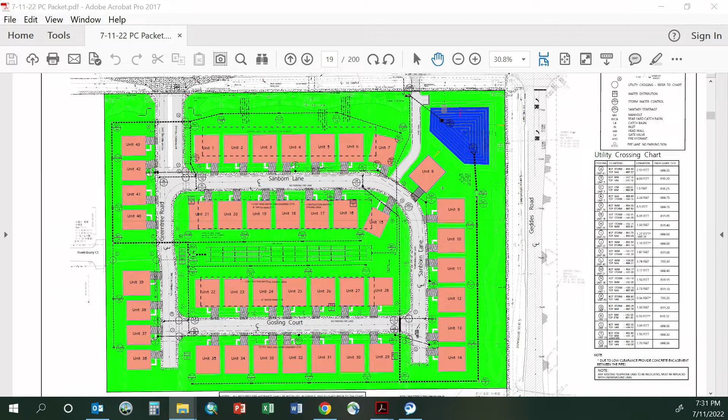Go right ahead. I move to recommend approval of the final site plan on tax parcel number 126-99-0008-701, which includes 43 single-family detached residential condominiums located on 11.51 net acres, subject to the applicant locating the entrance light poles closer to the sidewalk crossing at the entrance from Geddes Road, and also obtaining all agency permits and submitting financial securities to the township prior to review by the Board of Trustees.

All right, we have a motion on the floor by Commissioner Okon and support by... what's your name again? Foster, Commissioner Foster. I was having a mental block there for a minute. Any further discussion on that motion?

Nothing? Okay. Commissioner Okon, would you call the vote on this, please? Sure. Commissioner Foster: Yes. Commissioner Okon: Yes. Commissioner Watkins: Yes. Commissioner Weber: Yes. And Chairman Green: Yes. So the motion passes, and so it goes to the trustees.

Probably within the next month or so, that's correct? Okay. All right, good luck to you.

Our second agenda item of the evening is Greenland and Sage, where we're considering a site plan approval for property located at the southwest corner of Cherry Hill and Denton, part of Cherry Hill Village. The proposed use is a grocery store and bakery. Patrick, could you give us more detail?

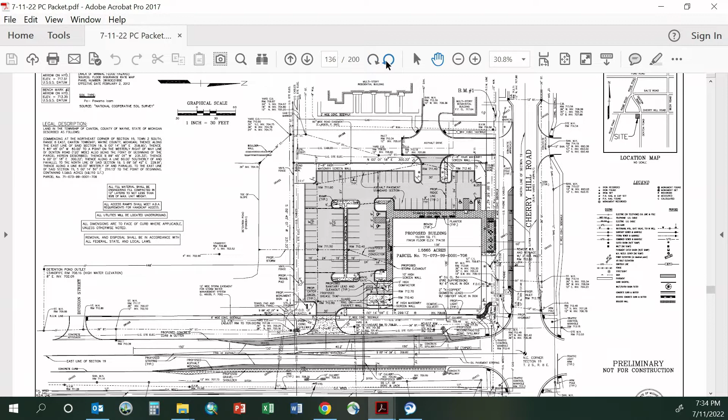Okay, north is to the right there, so I'll turn this. Okay, that's a little better. And the site is located in the...

The report says it's the village edge area, but actually this area is the village core, and that's in the Cherry Hill Village Overlay District. The ordinance states that the guidelines of the Cherry Hill Village design guidelines will prevail over the underlying zoning district. Although the original agreement for the PDD in Cherry Hill Village expired in 2014, the site is still subject to the standards of the Cherry Hill Village Overlay District, which is 6.09 of the zoning ordinance.

The last application on this site was a Rite Aid, which was approved in 2007, but it was not built and the plans eventually expired.

The layout of the Greenland and Sage building that's proposed is very similar to the layout of the previously proposed Rite Aid building, where the building is located close to the northeast corner of the site, and the parking is located to the west and to the south in the side and the rear of the site.

The Cherry Hill Village Overlay District requires that all projects be treated as a planned development. Each planned development district is required to demonstrate definite benefits to the community, and the definite benefits of the site include the architectural design and the outdoor dining amenities.

The Planning Commission reviewed the planned development for the proposed grocery store and bakery on February 7th, 2022, and also held a public hearing and recommended approval. At the meeting of the Township Board on March 8th, 2022, the Township Board approved the planned development for the site. The site plan has been designed in accordance with the plan development agreement.

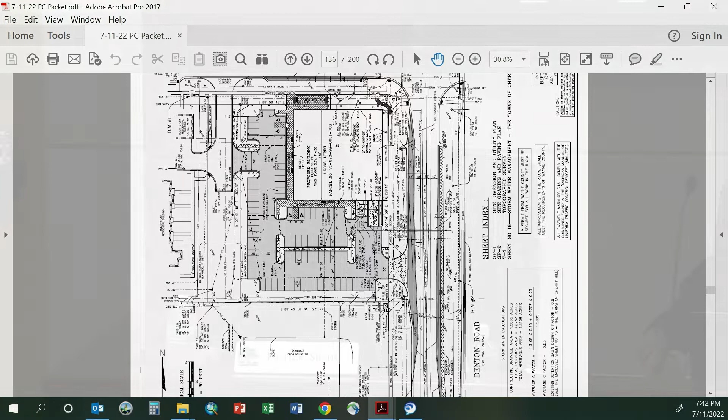Finally, for the stormwater management, the site is proposed to drain to the existing stormwater ponds located directly south at the corners of Cherry Hill. These ponds are designed to hold regional drainage, including for this site, and this site has been included in the drainage calculations within those ponds. Therefore, the pond and the drainage is already accounted for, but stormwater is under the jurisdiction of Wayne County, so we would defer to Wayne County when they do their eventual review of the plans.

So with that, the planning staff's recommendation is approval of the site plan for a grocery store and a bakery, as illustrated on the site plan for the reasons stated in our review, including waiving the foundation landscape requirements on the west and south sides of the building, and a waiver to modify the number of required parking spaces to 82 on-site spaces and up to 6 on-street spaces, subject to the items noted in our review being addressed and corrected, and also subject to all state, county, and township requirements.

The last item I want to mention is that the foundation landscape requirements on the west and south sides were areas identified during plan development review as not having the area for foundation landscaping, because it's a very tight site, with the building meeting an adjacent sidewalk. So foundation landscaping really doesn't work in an urban setting when it's up against the street or an adjoining parking lot in this case. The zoning ordinance gives the Planning Commission discretion to modify the landscape requirements, including the foundation landscape requirements, when appropriate. So we do recommend that the waiver be approved on the west and south sides of the building, although the landscape material on the site does include sufficient foundation landscape material elsewhere.

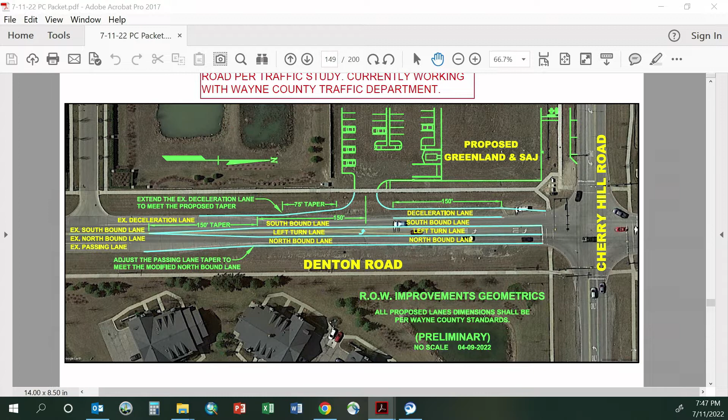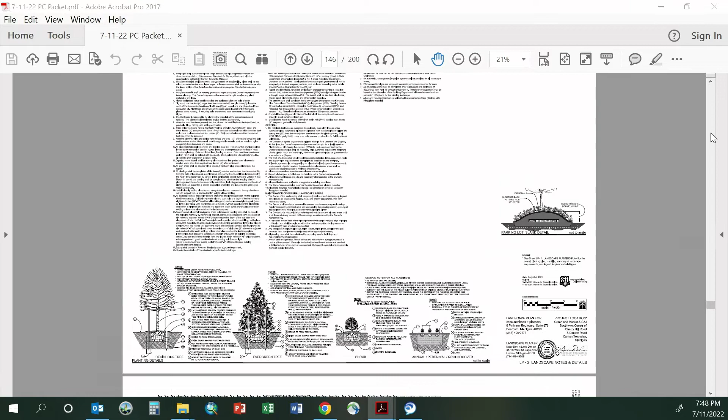One of the things about Denton Road, and everybody who lives in the community knows, on a Friday at 3 or 4 you're going to have school kids getting out of school, and at the same time people coming to the grocery store. The worst confluence of events is to have both things happening at the same time, and there isn't going to be sufficient capacity for the traffic that will be happening there.

The second thing, notwithstanding traffic going north and south, is that you've got buses, you've got parents. My kids go there, and I know what that line looks like every single day, backed up onto Cherry Hill and/or Denton to the north. So I just want to be sure that the traffic is really going to be addressed.

Love the development, love the changes that have been made, love that this project has been to the commission even before I became a commissioner. But I just want to ensure that the traffic is going to be addressed in the greatest way possible. The last thing we want is to build this in the greatest way possible and then look back and say, yeah, this is a bottleneck that we didn't address.

Thanks. Commissioner Okan. Yeah, two questions. Number one, Patrick, on the parking, so we're proposing 88 parking spots. If we look at the site plan, unless I missed it, where are the cart corrals?

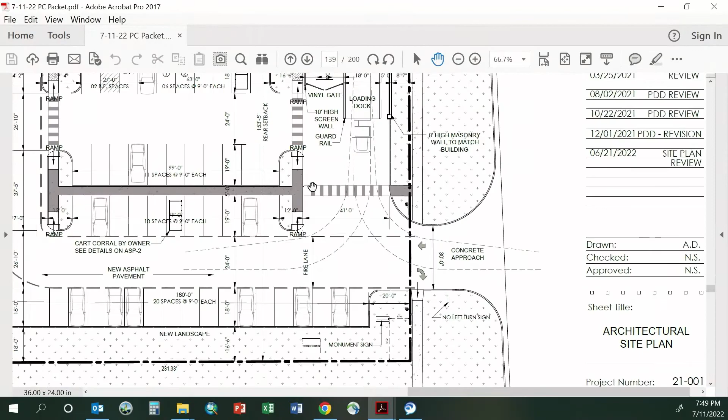The cart corrals will occupy three different spaces that exclude the 88 parking spaces. So there's one here, and then there's one closer to the building here, to the south. So the 88 is to the left, including the cart corrals, that's excluding them. So if the cart corrals were not there, it'd be 91.

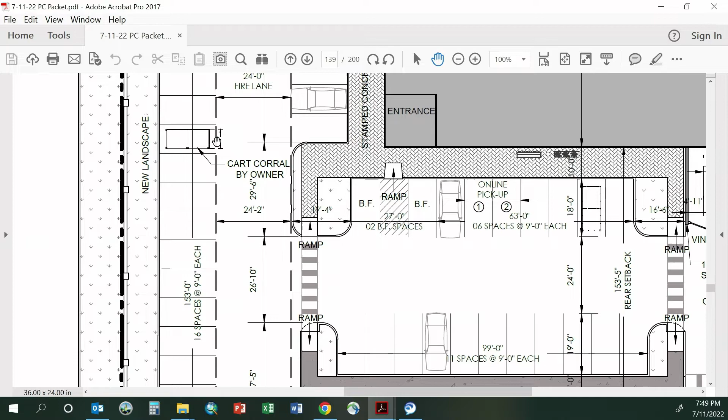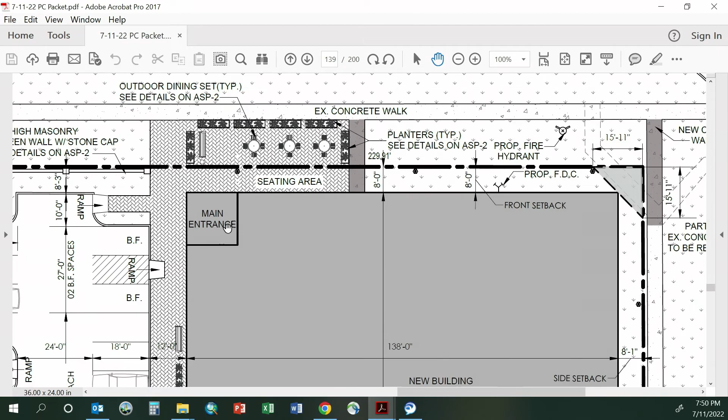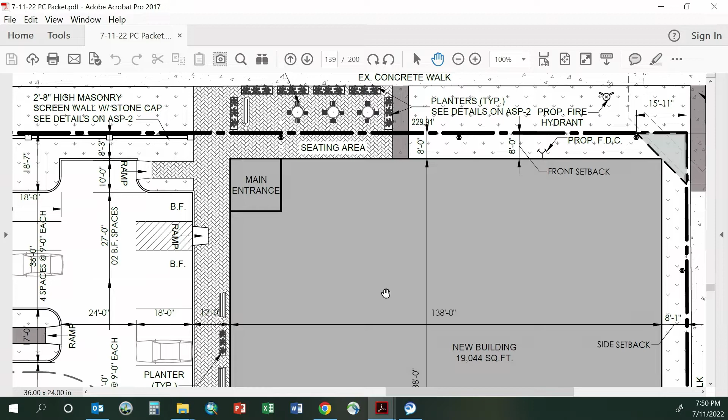And the second question I have, since this is an urban site with all the surrounding residential, do we have a designated spot for bikes? Bike parking, bike rack, anything? On this plan, I don't think that there is a dedicated bike parking area. I would just recommend having a designated area, because like you said in your report, I can imagine people riding their bikes up there, and it'd be nice to have them all in one area versus scattered throughout the parking lot or sidewalk. Other than that, I think it's great. I agree with Mr. Watkins.

It's hard to believe we're allowing a left-hand turn out of there onto Denton, but if that's what the county is recommending, I'm okay with it. One item of note - oh, no left turn right there. Yeah, this was something we addressed during the plan development review. There were issues with the potential for a left turn out of there, so the applicants put the no left turn sign on the plan development plan. So there will be a no left turn sign there. Perfect, thank you. Other than that, this is terrific, I can't wait for it to be built.

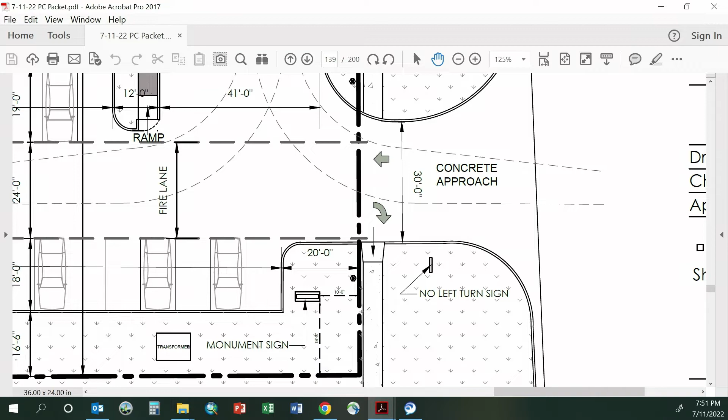You gonna start tomorrow? Well, to answer the commissioner's concern regarding commencement, the improvements to Denton Road are concurrent with the project construction. A traffic study was conducted - Wade Trim looked at it, the township engineering looked at it, the county looked at it. I'm only an architect, I don't do traffic, but they all buy into it.

While you are up there, I have a couple of questions concerning site things, like lighting. I'm concerned that whereas you have signage listed here on your exterior elevations, there is no lighting that is projecting outward. Is it going to be downlit? We would like - I don't know if Patrick can show the rendering. Our concept is to really create a downtown market feel to this, and we would like to revisit.

We did comply - I wonder if you can go to the colored rendering. We did meet the ordinance in terms of the foot candles and light pollution. But as far as the building facade itself, we would like to discuss that and see if we can put up some of that signage we show on the rendering. We think that's an enhancement to the downtown look. We have some waterfalls shown... for some reason it's not showing up, I'll have to close it and restart it here.

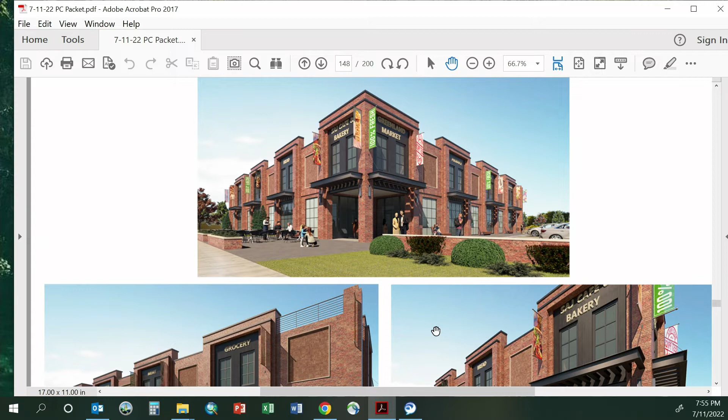Okay, again, we intend to comply with the zoning ordinance. The other concern - let's go back to Commissioner Okan's question, which was excellent. If we're talking about this being more of a walkable community, people will be riding bikes, et cetera, and they need a place to put those bikes. We had that at one time, and we think the right location for that bike rack is right by the patio on the north side of the building, on Cherry Hill. Okay, so can you work with staff on something like that, in terms of positioning, numbers of slots? Absolutely, yes.

And I think that would answer your objection, Commissioner Okan. Yeah, the other thing that I have is a very visible thing.

So you're going to have 3 cart storage areas. What happens to those carts after hours? What will happen? They would be put together and secured and in place. In those storage bins? I would assume, yeah, unless, not inside? In the store or in the corrals? In the corrals. Is that the intent?

No room for them to be moved into the store? There is some room, yes. I would prefer that. That's a much better look than having them contained in the corrals.

Frankly, personally, I am against the corrals because putting the corrals in there, that is an opportunity to have all those carts congregate there sometimes in a chaotic way. Not having the corrals in there forces the management to take them inside.

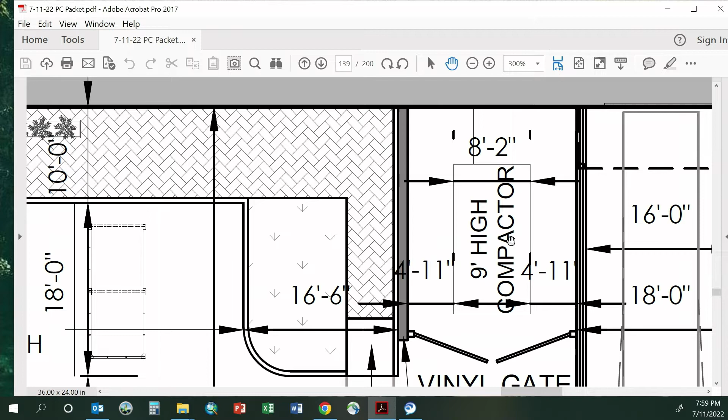Obviously to avoid it going into the stormwater. But my point is not to bore you with the details, that has been thought of.

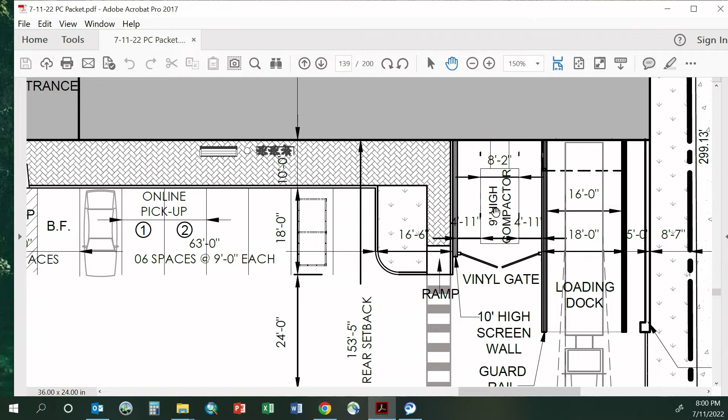And we've addressed the hours that they can operate that compactor, right? Because compactors make a lot of noise. And being that that compactor is facing the south, that noise is going to go right to that adjacent neighborhood. So how late can they operate that compactor?

There have been cases before, I think BJ's Wholesale comes to mind, when we had a condition where there were certain hours that they could run the compactor because they were by a residential neighborhood and there was concern that if it's a high volume business late at night, that could be an issue. There were concerns from the neighbors about the noise, primarily from Lowe's, but they were concerned with BJ's having the same impact. So in that case there was a restriction on hours that the compactor could be operated. In this case, the plan development doesn't have that condition in terms of the hours.

And I don't know what the noise impact is, given there's a few rows of parking and some landscaping between the compactor and the residential area to the south. So I don't know what the noise impacts would be.

By default, the noise provisions of the zoning ordinance would apply. So the maximum noise goes down during the nighttime hours, so it's quiet, and then higher during the day. So if there was no condition, then the noise ordinance would still apply. So if there were noise impacts at night that exceeded the zoning ordinance, then ordinance enforcement would have to work with the business owner to comply with the ordinance.

But also, the truck dock has room for one truck. Do you have a plan in mind should you need two trucks, one waiting for the other to be unloaded? Do you have a stacking area within the parking lot? We do have allocations for that. We have a truck well for deliveries, and the compactor is also picked up with a truck, and that has its own access.

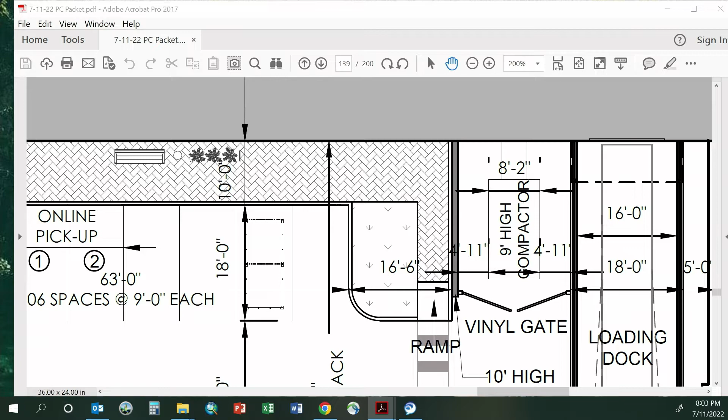Okay, all right, well, those are my main concerns. I do echo the comments of my fellow commissioners that we welcome this project. I think it'll be good for Cherry Hill Village, good for the community, and I think you're going to get business from beyond Cherry Hill Village once the name and reputation get out there. So I wish you a lot of luck.

With that, does anybody have anything they also want to say or make a motion or anything like that? Anything at all? Okay. Chair, I have it. You have it, go ahead. Right, yep, sure, go ahead.

I move to recommend approval of the site plan for a grocery store and bakery on parcel number 073-99-0001-706 as illustrated on the site plan, including approval of a waiver of the foundation landscape requirements on the west and south sides of the building pursuant to section 5.07 of the zoning ordinance, and approval of a modification to the number of required parking spaces to 82 on-site and up to 6 on-street spaces pursuant to section 4.01C6 of the zoning ordinance, subject to all state, county, and township requirements, and subject to the following items to be addressed and corrected by the applicant.

The project scope includes interior remodeling, removing a drive-through lane, adding a large glass vestibule to the front of the building, which is illustrated here in the picture. Also staining the building brick, adding a dumpster enclosure in the northwest corner of the site, and removing 2 parking spaces as a result.

Going through some of the changes, the schedule regulations of the zoning ordinance in terms of setback, building height, et cetera, are all met by the proposal. The proposed glass vestibule will make it a little closer to the road, but there's still a setback of over 100 feet from the front lot line.

For the traffic circulation of the site, there's no curb cut on Ford Road, and none is proposed. The site has access through cross-access drives from the west, north, and east, so there's plenty of access in and out of the site, which will be maintained.

For the architecture of the plan, most of the proposed changes to the site plan overall are ordinarily subject to administrative staff review. However, when there are major changes or changes that require a discretionary decision, that's when the review is under the purview of the Planning Commission, and in some cases also the board, but in this case it would be under the purview of the Planning Commission.

The major changes to the architecture include adding the large glass vestibule to the entrance and staining the brick to a tan color. Currently, the brick is a red brick, and there's an illustration here in the packet that I'll show in a few minutes. The applicants propose to stain it to the colors shown here in the picture.

The stain, by looking at it, looks much like paint in that it would color both the brick and the mortar and make those a uniform color. The difference is that a stain penetrates the material and allows it to breathe, while paint encapsulates the material and traps in moisture. So sometimes painting can potentially damage the brick and mortar if it's trapping in moisture and not properly maintained.

Stain, although there are some maintenance items with it, has much the same coloring effect.

The proposed glass vestibule - while we believe the current architectural concept is preferable to the proposed entrance with the vestibule, especially given its size - the architecture is not inconsistent with the Central Business District overlay design standards. So the design is basically how the Planning Commission looks at the design standards of the district, as well as comparing it to the design of the current Huntington Bank building.

For the staining of the brick, this is not something we recommend, because the stain appears to have the effect of painting it, fully changing the color of both the brick and the mortar. The existing building is predominantly brick in a deep red tone.

Although the letter submitted by the applicant states that the tan color has been used successfully in other buildings owned by this credit union, the lighter brick does not enhance the facade and does not enhance the Ford Road corridor based on the proposal.

Therefore, staff's recommendation for the facade color is to retain the natural red brick or replace the existing brick exterior with new tan-colored brick that's integrally colored. However, the Planning Commission is authorized to approve facade colors in accordance with the zoning ordinance, so we'll defer to the Planning Commission regarding the staining of the brick and, if so, to what extent.

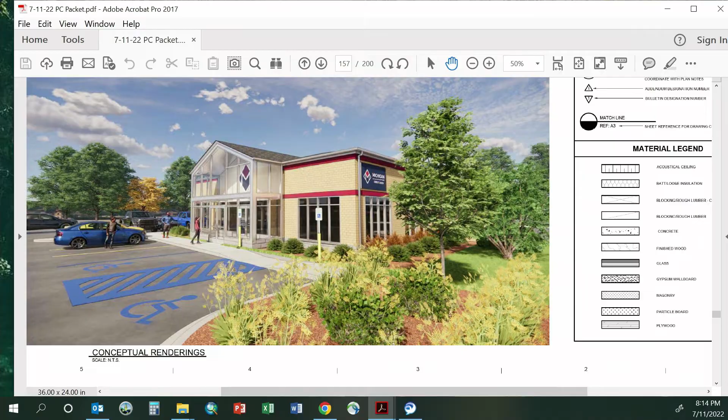But all signage must comply with the zoning ordinance. There haven't been any variances granted, and this will be verified by the Building and Inspection Services Division during their building plan review, as they review all signage. Although the signage plans note that the applicant intends to seek a variance, we believe compliance with the zoning ordinance is attainable without a variance, but that's something the applicants would need to design to and work with the Building and Inspection Division on.

So our recommendation is that while we approve of the site changes, including adding the dumpster enclosure, reducing the parking spaces, and removing an additional drive-through lane, we recommend deferring action on the proposed staining of the building pending receipt of revised plans that address the concerns noted by staff in our review.

We've prepared two model motions for the Planning Commission's consideration. One is pursuant to staff's recommendation to defer action on the site plan. There's another option for a model motion to approve the plans as proposed if the Planning Commission so chooses.

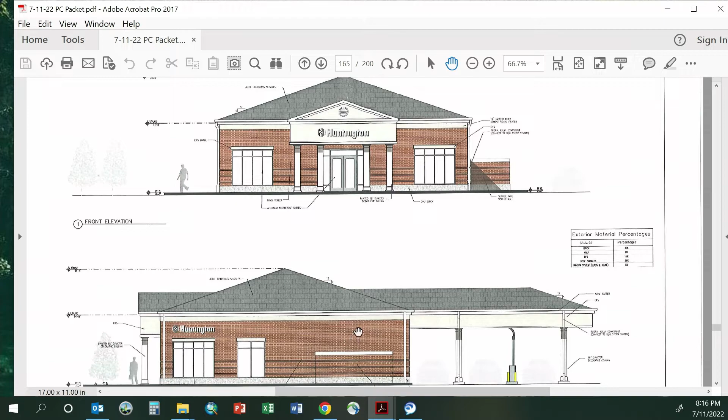So that concludes our staff report, and we'll be happy to take any questions.

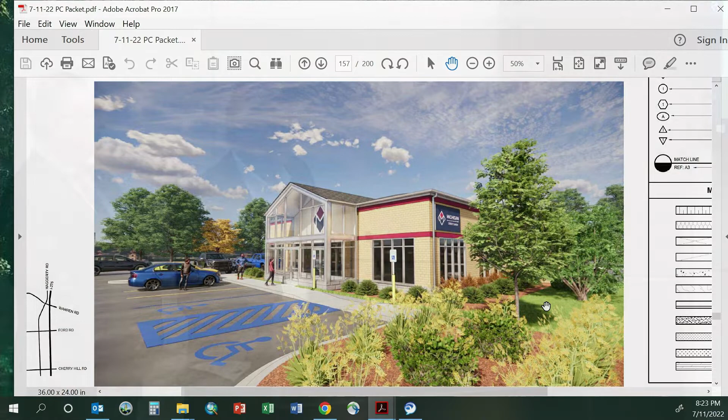It was one other point. Go ahead, Steve. Mike said that we've applied this since 2017 and have not had to redo those products. But our buildings are professional in every community that we are involved in. And the minute that does require it, or it needs a roof, or it needs new landscaping, we're going to do that.

Okay, thank you, thank you for working with us here. I'm going to start with Commissioner Weber and see if you have any comments or concerns.

First of all, I have no doubt that you're good corporate citizens. I mean, most banks in the community are credit unions. I think for the most part, I think all of us can say that the banking facilities that have been in our community do a pretty good job of maintaining their properties in our township.

I appreciate what you're trying to do, and I would be a hypocrite if I said that I don't like the staining of the brick or whatever, or the color, because I've been one in past meetings to say that I'm tired of everything being brown in the township and that sort of thing.

I will say this, and I understand it's part of your branding, I don't particularly care for this color. Maybe the rendering doesn't do it justice. The color of the actual brick there actually is a little more palatable to me than what this color is in the rendering. No offense, but this kind of looks like a McDonald's to me.

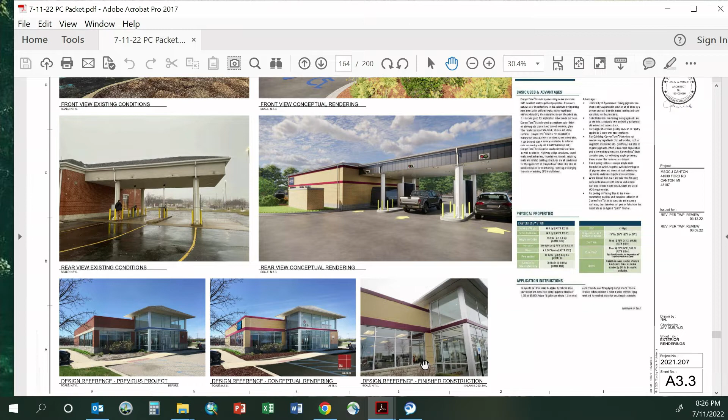But this bottom screen here, this was a branch we did 18 months ago. We had a red brick. That was our rendering. This is the actual picture from the actual product applied to the brick. So you can see that it's much more, I would think it's a little better because it's a photograph aligned with this color, just to kind of put it into perspective. That helps a little bit.

Sorry, it doesn't change my opinion. Okay.

I'm more happy to have you in the community. I would like for you to be here. I don't want to see an empty building sitting on Ford Road.

But I'm sure, as you know, and Patrick's probably told you, we're about to undergo, within the next couple of years, a big transformation of Ford Road. And I'm not sure what all the future holds in that regard. And granted, we're just talking about the road itself right now, but who knows what that leads to on either side of the road.

Again, I appreciate what you're doing, but I can't get behind this design. I'm just not a big fan of it, but I'll defer to my fellow commissioners. Okay, thank you very much.

Commissioner Watkins: Thanks so much, Mr. Chair. This takes my mind back to 2006, when we were in downtown Detroit trying to rehabilitate the Book Cadillac Hotel. We had an opportunity to do a $200 million renovation through the City of Detroit and our partner from Ohio. They wanted to do the same thing with the Louis Kamper design on the front, a historic design. This isn't historic, but the first thing they talked about at historic was that staining brick is not a great idea.

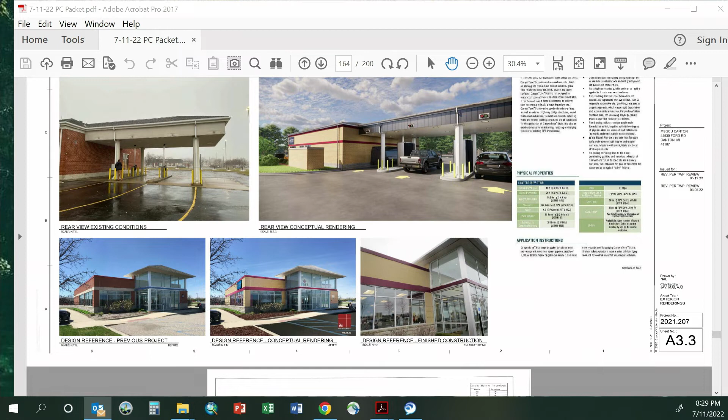I don't mind having variations of color of brick on Ford Road or any part of Canton. That doesn't bother me as much, but I do not like the look of the painted or stained brick. In the picture you showed, you could see it even clearer—it looked actually painted. So yeah, I'm not a fan of that. That's it.

Commissioner Okan: I guess I'm the oddball out here. I don't mind it at all, I think it's fine, I've got no issues with it. I'm glad to see this building being taken over by a good company willing to throw some money into it. I don't mind the staining of the brick. Other than that, I'm good.

My impression, gentlemen, when I first saw this packet, was 'oh no.' First of all, I love the idea of changing the entrance—that part is great. But my first impression was no, no, no, do it with the brick that's already there. That was before hearing from you that this is part of your brand. I believe in branding, I really do.

But one thing bothers me about tonight: you went through great detail about the brick you use when you actually install brick on your buildings, but that's not what's being proposed to us. What's being proposed is painting or staining that's supposed to emulate that, and it's the emulation I have a real problem with, because now what I'm feeling is you're basically just going to throw a look into Canton, and I don't agree with that. I'm willing to keep an open mind about the color change—I prefer the red on first blush, but again, I believe in branding along with you. My feeling is, if it's the brick look, give us the brick. You went through a lot of detail about the quality of that brick, but you're going to give us a stain. To me, that's not equitable in terms of what we're getting along Ford Road.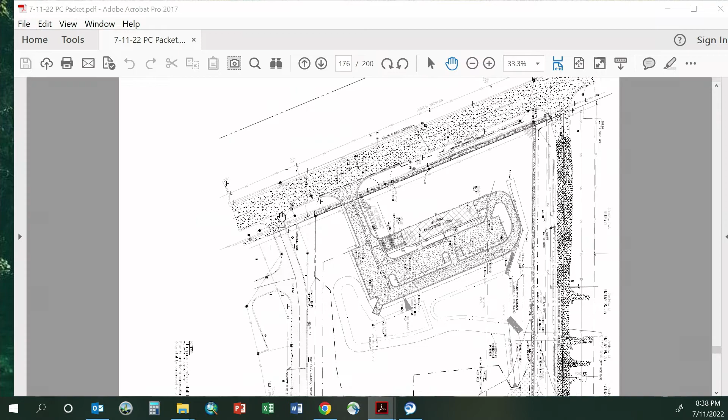The site is about 6.85 acres, and the development portion of the site goes much farther back to the south. As you can see in the illustration here, the parcel continues to go southward, so only about the northern half, give or take, of the site is proposed for development, which is the Michigan Avenue frontage. The area on the south side of the site just remains open at this point. There may be a point in the future where there's proposed commercial development farther south of the site, but that's not proposed at this time, nor is it planned for by the applicant.

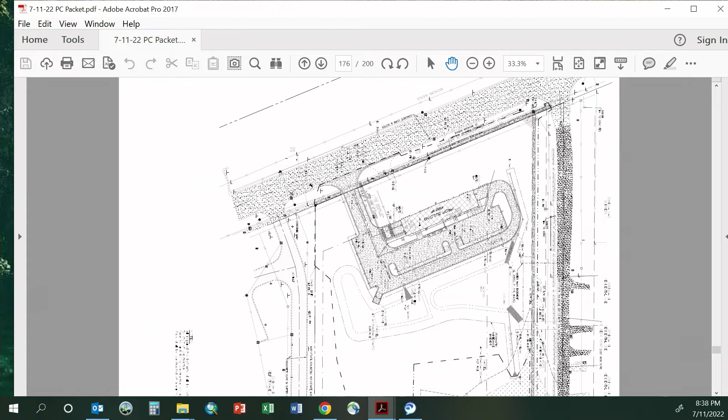The plans are much the same as they were when the applicants came before the Planning Commission for special land use review. The schedule of regulations of the zoning ordinance are in compliance with the C3 zoning district for the site size, the setbacks, and the building height.

The plans also illustrate compliance with the zoning ordinance for the automobile wash establishment development standards. The vacuuming facilities are located in the rear of the building on the south side. The orientation of the bay is in the side yard on the west, and although the orientation is to the non-primary front to the east along Beck Road, the zoning ordinance states that for the orientation of the bays, the building should be oriented so that bays, particularly for self-service auto washes, do not face onto adjacent thoroughfares unless screened by an adjoining lot or building. That would make a car wash on a corner lot virtually impossible.

The word 'should' is in the zoning ordinance as it relates to this, and it specifically addresses self-service car washes. So what we have here is the eastern bay door. It faces Beck Road, but on the landscape plan, there's significant screening along Beck Road, in addition to the distance from the bay door to the lot line. So there's quite a bit of distance, and there's a berm and landscaping along Beck Road. And that bay door facing Beck Road is where cars go in, so in terms of headlights and glare that may come out onto the road, that would not be there on that side.

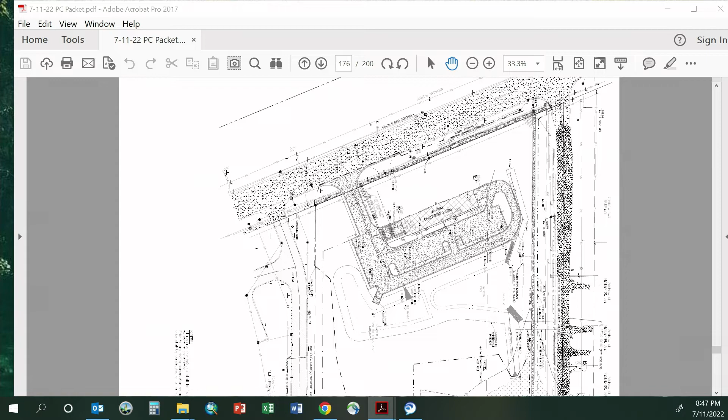Finally, for the vacuum enclosure, the submitted plan includes notations related to the vacuum enclosure. Details related to the fixtures must be provided to illustrate the proper screening. We also recommend that the applicant include cut sheets, images, and labels of the enclosure fixtures, as well as the dimensions, height, and width of the equipment inside the enclosures.

So with those items, our recommendation is approval of the site plan for the automobile wash establishment, as illustrated on the site plan, for the reasons stated in our report, subject to the items noted in our review being addressed and corrected prior to the board review of the plans, and also subject to all state, county, and township requirements.

The model motion that we prepared for the Planning Commission lists out specifically 7 conditions of approval. Most of them are relatively minor in terms of additional items that have to be included on the plans. We recommend that these items be included on the plans before the board reviews them, so that if they are done by the time the plans get to the board, it will be with few, if any, conditions.

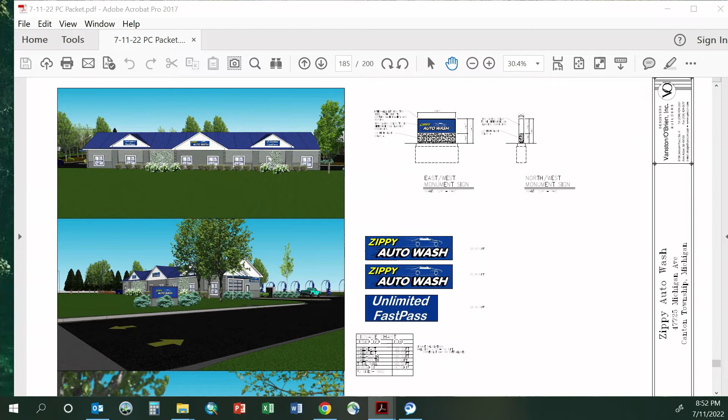So you'll still have people that wave them in and go a little bit that way — will that collect the money, or will that be prepaid? It's all prepaid. We have a pair of auto tellers or auto cashiers. If you can see on the site plan, perhaps on the south side of the site, there are a pair of entry lanes which lead up to those auto cashiers. Customers can select a wash and pay at that point.

And are those solar panels on the south side of the building? They are, yeah. So being clean and green is a key part of our business, and we've incorporated solar onto the south-facing roof of the facility, which we expect to be a significant productivity enhancement to the site in terms of energy generation.

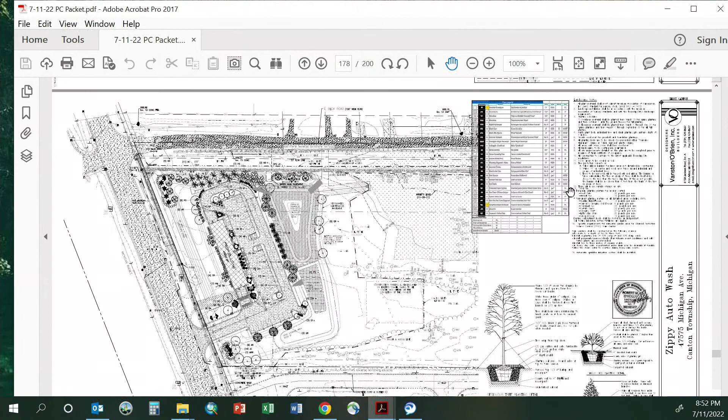We also have an electric vehicle charging station, both for employee use and potentially for customer use. And in addition, we have our high-efficiency water recycling system.

Okay, well thank you for doing that, because, for two reasons: number one, I'd love to see the integration of the solar, and then also it alleviates me from saying why didn't you put more emphasis on the design of the south side of the building. Exactly, it wouldn't have worked, the roof line wouldn't have quite worked the same way with the solar panels not there, so. Anybody else have anything?

Super quickly, through the chair, to the developer, probably asked this last time, you're shooting for an average annual car count, and I think you're open anywhere from 360 to 365 days per year. Correct. Yeah, 363 days per year, and a few hundred cars per day is a good day for an express exterior auto wash.

There can be some big days in the wintertime when, as we say, the stars align, so snow followed by dry roads, salty cars, sunny day. Saturday, for example, can generate significant numbers of cars, 1,000 cars in a day, so.

Anyone else? Just a couple quick questions. Patrick, where the vacuums are, it looks tight, but there's plenty of room for two-way traffic there?

Yeah, I'll pull that part up here. While he's looking that up, just a suggestion, because one of your other competitors has been in here recently, and

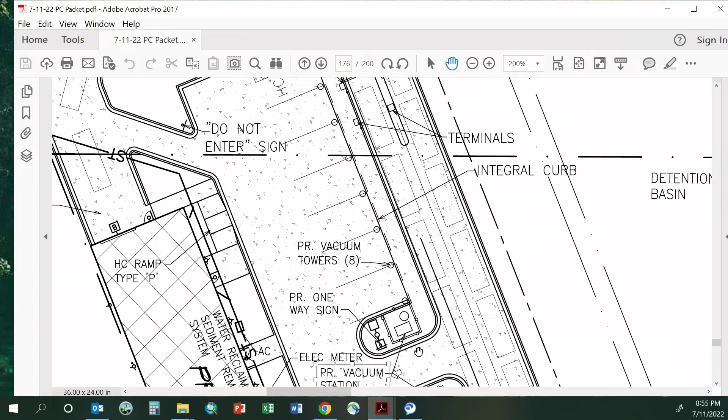So there's plenty of room there for two-way traffic? Yeah, the drive aisle has to be at least 22 feet wide, and this might not be the sheet that necessarily has the dimension, but the drive aisles are 22 feet wide, so it's typical of any other parking lot that's got to have a minimum 22-foot aisle. So whether it's parking or there to vacuum, the aisle is two-way.

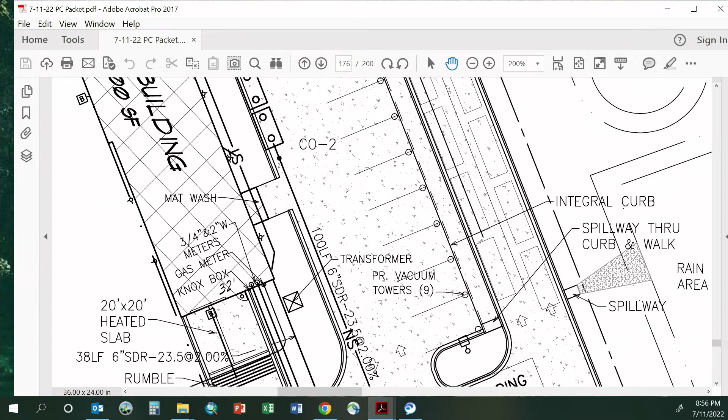Sounds good, look forward to it. Go ahead, Commissioner Weber. Since Commissioner Zuber's not here, I think she's the one that brought up the addition of quoins to the architecture the last time. And I'm sorry, Patrick, I sort of missed what you said, how they were treating the quoins, or what you were suggesting to do with the quoins.

Yeah, the Planning Commission had recommended that the quoins be colored the same as the window outline. And I can bring up the color elevation to illustrate that. So the quoins here, they're the corner of the building, and these little bump outs, so those are quoins. And I think, looking at the notes of the Planning Commission meeting, the Planning Commission recommended that they be colored the same as the window outline.

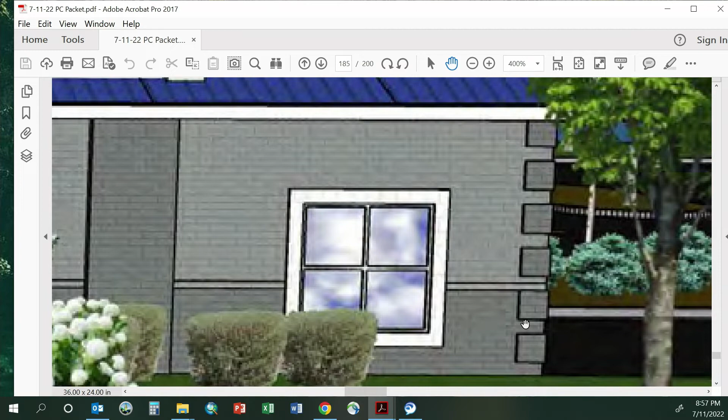And here, they're a darker gray. It definitely contrasts with the upper masonry. There's a color contrast, and although it's the same color as the lower masonry it's not as visible, and there is a contrast by having the bump out, so there's the depth there. So the recommendation by staff is just to be consistent with the previous Planning Commission recommendation. But the architecture is at the discretion of the Planning Commission now that it's here.

So you're recommending the dark color for the quoin? You're recommending paint them white like that window outline, right? We had recommended, just consistent with the Planning Commission's previous recommendation, that it be the same as the window outline. But the way that it's colored now, I think it looks good. I do think it too, looks better, I do too. I don't think I'd like them white. They'd look like teeth.

Buck teeth - that's a condition that can be removed if you like. It's probably one of the more minor ones I prefer, the contrast in the grays. Me too. How does anybody else feel about that, the gray, as opposed to the white?

One question too, in terms of access. So if the car wash is closed, will people still be able to drive through and use the vacuums and whatnot? Vacuums will shut off at the same time as the business, so everything will be closed.

Will there be ample lighting of the entire lot and facility even after you're closed? Because I see that as a potential dangerous area since the building blocks the view from Michigan Avenue. Correct, we plan to keep the lighting on after. All right, for security purposes, I think that's great.

Well, one thing I will commend is that it's a nicer-looking car wash than a lot of the ones we've seen, so I do commend you for that.